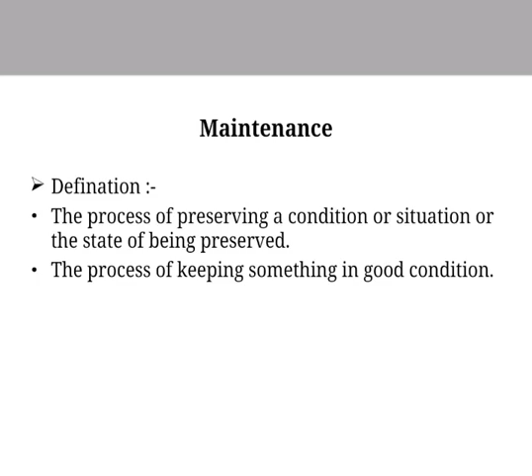Maintenance increases the availability of the equipment by reducing the downtime.

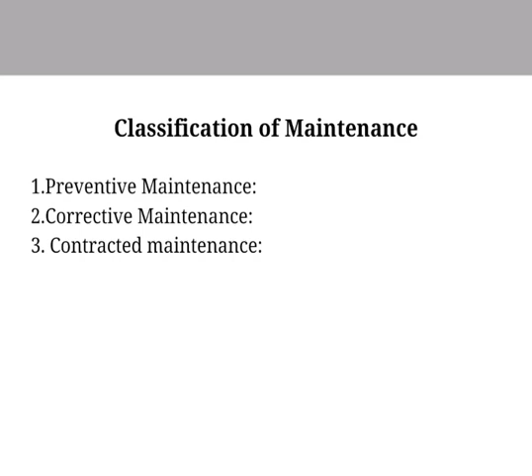What are the classifications of maintenance? First is preventive maintenance, second is corrective maintenance, third is contracted maintenance.

First we have to discuss preventive maintenance. Preventive maintenance can be defined as an equipment maintenance strategy based upon replacing or restoring an asset at a fixed interval regardless of its condition. It is basically a type of maintenance done at regular intervals while the equipment is still functioning, with the objective of preventing failure or reducing the likelihood of failure.

Preventive maintenance is important because, owing to tear and wear in electrical components, aging of the material may cause partial or complete breakdown. Whenever parts in any piece of equipment show signs of damage, they must be timely repaired. This is nothing but preventive maintenance.

If the electrical equipment is to give trouble-free continuous service and its lifespan is to be prolonged, then it is necessary to implement an effective preventive maintenance.

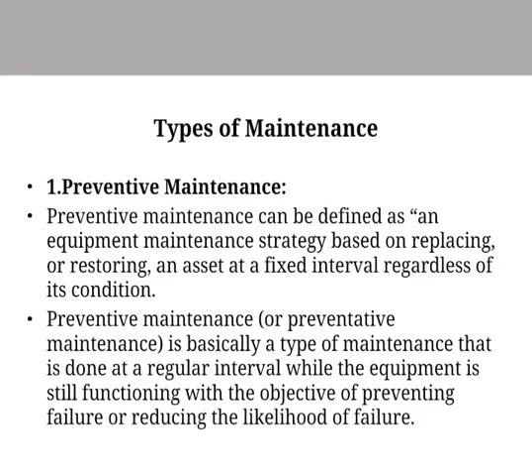Now we discuss the advantages of preventive maintenance. It reduces breakdowns to a minimum. It prevents unscheduled interruption to various machines and equipment, and premature failures.

Whenever we schedule the maintenance, breakdown will be avoided and we can keep the system in proper operating condition. The cost of repair is reduced. This is its importance.

It provides greater safety and protection to the worker, avoiding various hazards. It increases the life of the machine. Because of preventive maintenance, it lowers wear and tear of the machine and other equipment.

It makes the working condition better and increases the life of the machine. Less standby equipment is needed whenever we carry out preventive maintenance. It provides greater safety, and the cost of the system will be reduced.

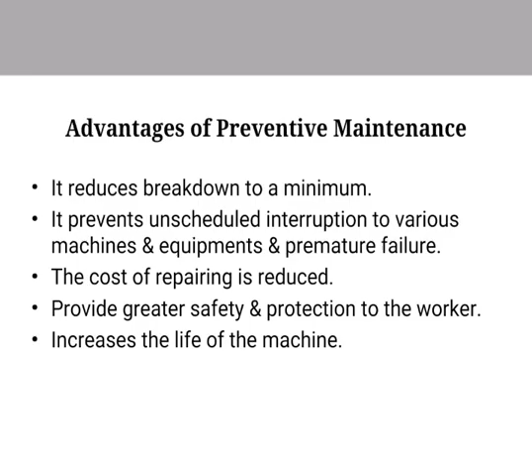Now we discuss the classification of preventive maintenance. First is routine maintenance. It should be carried out daily if possible, and includes visual inspection of various electrical systems and machineries. Minor repair work is also carried out, such as replacement of small parts and adjustment of equipment.

Routine maintenance includes work like cleaning of electrical equipment from dust and dirt, cleaning of fittings, tank cover, and bushing of the power transformer, cleaning the fixed and moving contacts of the starter, and replacement of burnt contacts. The routine maintenance of electrical motors involves washing and lubrication of bearings, checking of control equipment, and replacement of carbon brushes, etc.

There will be work carried out in the routine maintenance, and this maintenance work is carried out by the maintenance staff in the industry.

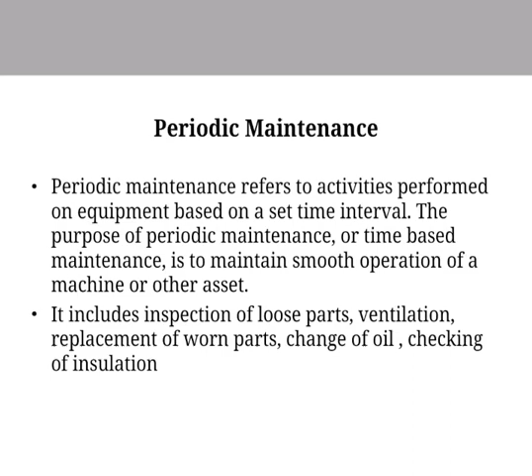The second one is periodic maintenance under preventive maintenance. Periodic maintenance refers to activities performed on equipment based on a set time interval. The purpose of periodic or time based maintenance is to maintain the smooth operation of a machine or other asset. It should be carried out weekly, monthly, quarterly, half yearly and yearly according to the requirement of the system. Periodic maintenance includes inspection of loose parts, ventilation system, replacement of worn parts, change of oil, and checking of insulation. These are the different activities carried out in periodic maintenance.

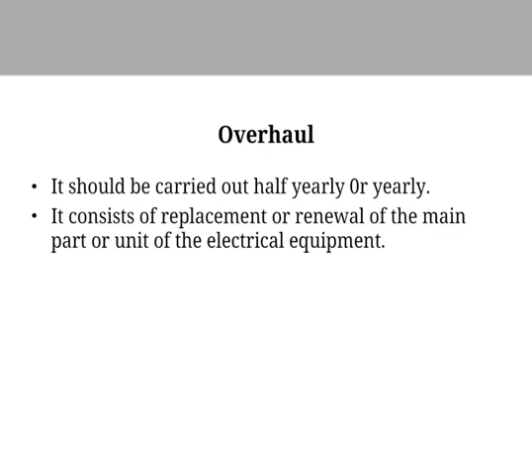The third one is the overhaul. It should be carried out half yearly or yearly. It consists of replacement or renewal of the main parts or units of the electrical equipment. This overhauling maintenance is carried out on a yearly basis. It involves work such as rewinding of motor stator and rotor, and replacement of bushings of high voltage circuit breakers. It involves partial or complete dismantling of the equipment. This is the overhauling maintenance.

The fourth one is maintenance on fault. It is carried out immediately whenever required, when a fault occurs. Suppose a short circuit fault occurs and blows a fuse, we have to replace the fuse. This is very important.

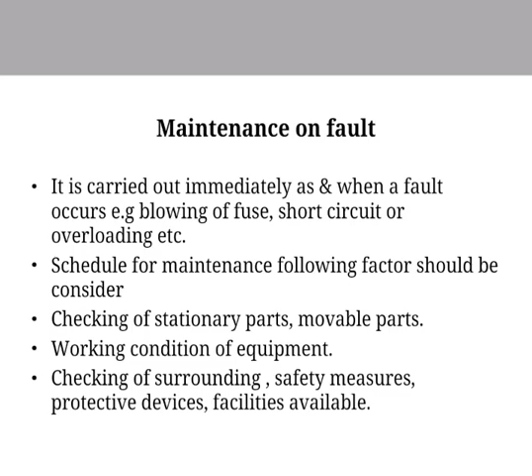Then, scheduling for maintenance. The following factors should be considered: checking of stationary parts of the system as well as moving parts, checking the working condition of the equipment, checking the surrounding condition of the industry as well as surrounding condition of the equipment, checking safety measures, checking protective devices, checking the available facilities present in the industry, checking the store and spare inventory parts, and checking the tools, tackles, jigs and fixtures. This is very important for maintenance purposes.

Then we discuss breakdown maintenance. Before that, we consider the different causes of breakdown. The first one is faulty design or construction, meaning whatever the motor or equipment, if it is designed improperly, a fault occurs and breakdown occurs. Then incorrect installation of the equipment, meaning the equipment is not properly installed in the industry, because of that a fault will occur.

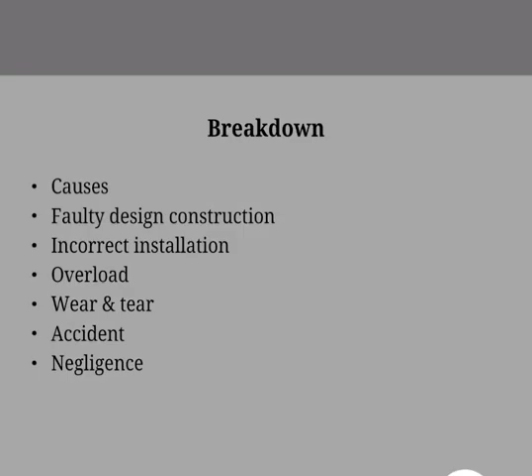Then overload condition: suppose equipment carries a certain amount of load, if you overload that motor or machine, then a fault or breakdown will occur. Then wear and tear of the parts of the machine will occur in the industry, because of that breakdown occurs. Then accidents may occur incidentally or suddenly, causing breakdown. Then negligence or carelessness of the manpower in the industry causes breakdown. These are the different causes of breakdown in the industry. We have to see what causes breakdown.

Then we discuss breakdown maintenance and the different steps to carry it out. The first step is engineering records. The engineering records are maintained in a diary, noting the current and voltage, the power factor present in the system, and we record it periodically on a timely basis.

We have to understand the working condition of the machine, and whether any maintenance is required on that machine or system. We have to understand the exact condition and the reason behind any fault occurring in the machine, calculating it from the engineering records.

The second one is the inspection. This is the main part carried out during maintenance. The inspection must be carried out by a senior and competent person who has detailed knowledge about the maintenance work. Inspection can be divided into two main parts: the external inspection and the internal inspection.

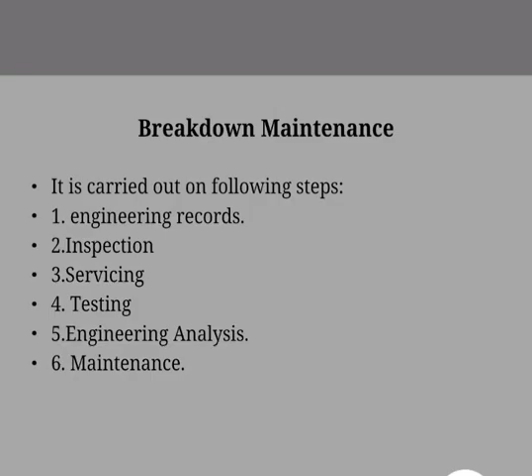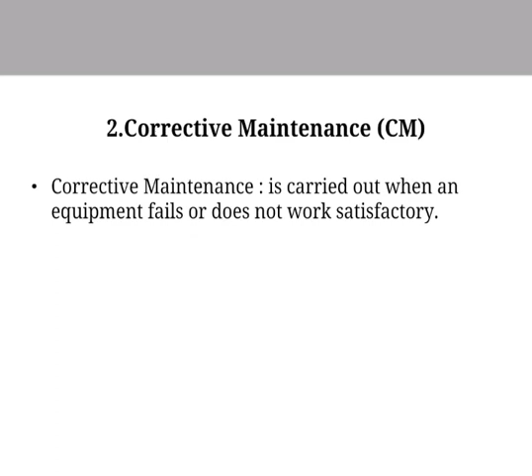Then we have to see maintenance. After the engineering analysis, we have to determine what maintenance should be carried out on the equipment. The second type is corrective maintenance, which is carried out when equipment fails or does not work satisfactorily. After the fault occurs, we have to carry out corrective maintenance.

Then emergency maintenance is a corrective maintenance that is so urgent that it breaks into our forward weekly schedule.

Then we have to see the comparison between preventive maintenance versus corrective maintenance. Preventive maintenance is carried out before a fault occurs in the system in order to reduce failures of the equipment and maintain the proper condition of the equipment so failure does not occur.

What is corrective maintenance? This is carried out after the fault occurs in the system, and we have to repair or maintain the system properly in order to obtain the proper operating condition of the equipment.

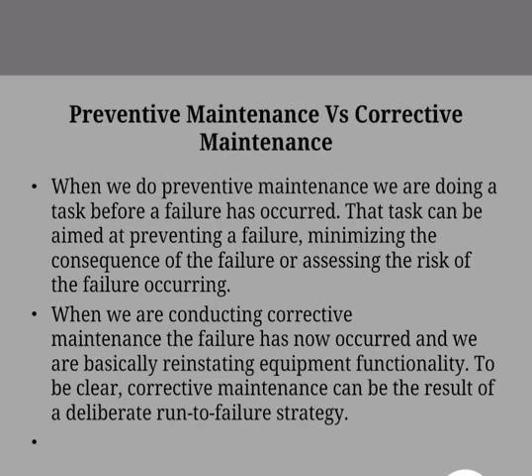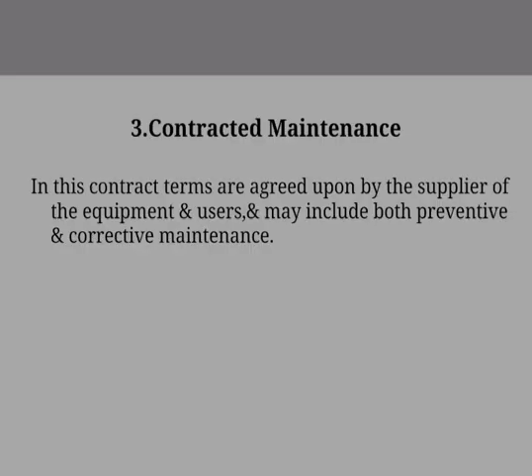Then the third one is contract maintenance. In this contract maintenance, the contract terms are agreed upon by the supplier of the equipment and the user. They may include preventive maintenance as well as corrective maintenance, where the supplier gives servicing or maintenance to the equipment. These are the different types of maintenance.

It is very important in order to maintain the equipment in proper operating condition, to increase the reliability of the system, to increase the stability of the system, and to increase the productivity of the system. So maintenance is a very important part in the industry.